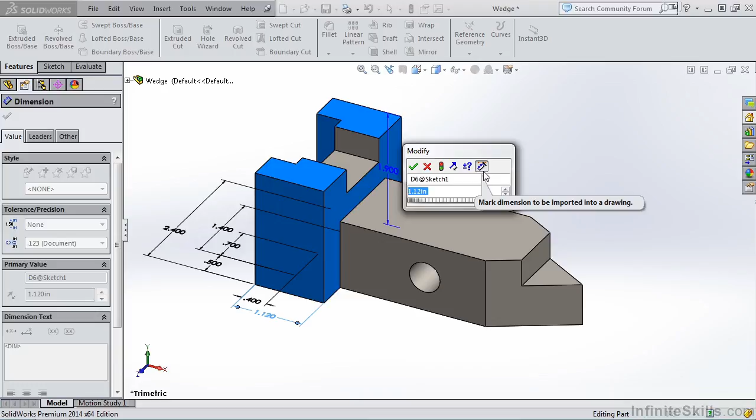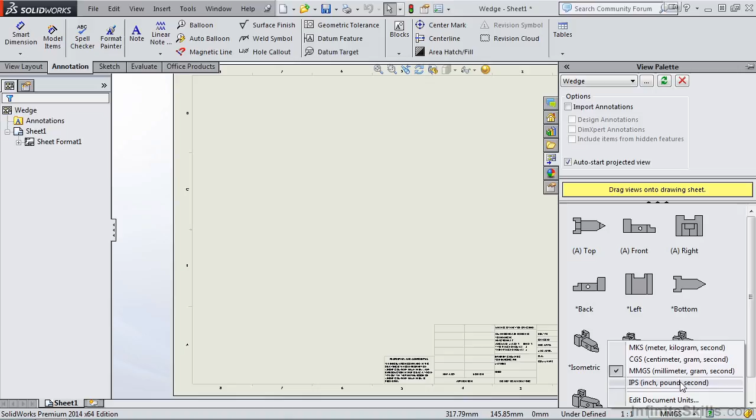With that said, let's close out of this dialog box and close out of this property manager, and let's create a drawing for this wedge. I am going to select the drop down next to the new icon, and then select Make Drawing from Part. We're going to use a B ANSI landscape. I'll select OK. And because the wedge was created in inches, I need to change my units to IPS. Now I'm ready to insert the view, so I go to the View Layout ribbon, select Model View, then Browse. I'll select the wedge, Open, and now I'm ready to place it on the sheet.

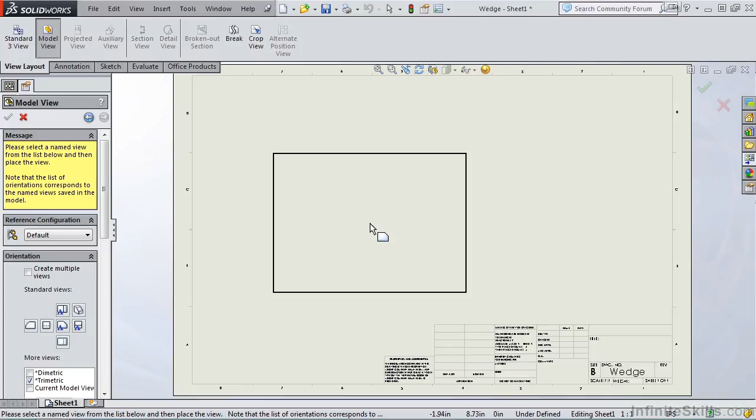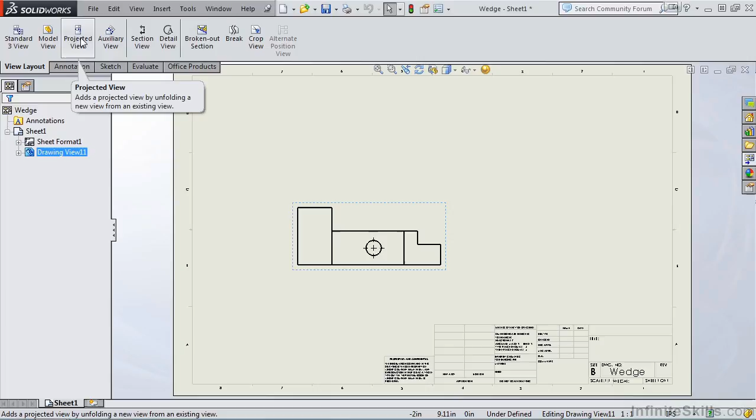For some reason, this rectangle looks too large for the front view I'm expecting. But let's go ahead and place it to see what we have. And this is why it's too large. It gave me a trimetric. Not a problem though. I simply need to go to the property manager and select the front view. There we go. I'm going to close out of this property manager, go to the View Layout ribbon, select the projected view, and project a right-hand side view and a top view. We'll then reposition the views so we have a little more room.

And now we are ready to import the driving dimensions that were used to build a 3D model for this wedge. So how do we import the dimensions? We need to go to the Annotation ribbon and select Model Items. The Property Manager opens, and at the very top of the Property Manager is asking for a source. Now, do you want the source to be the entire model or a selected feature on the model? I want it to be the entire model. Right below this, when we import these model items, do you want to import it to all of the views? In this example, it would be the front, top, and right side view. Or do you want to import the items to the front view, for example? I want to import the items to all views, so I'm going to put a check mark in this checkbox.

Right below this, we have an area for dimension model items. Notice one is already activated. This one is marked for drawing. These are the dimensions that were marked for the drawing back in the part environment. The next option is for not marked for drawing. Then we have instances and revolution, we have tolerances, and a few more. I'm only going to select the dimensions marked for drawing. Notice we have a checkbox to eliminate duplicate dimensions. Typically, you want that checked.

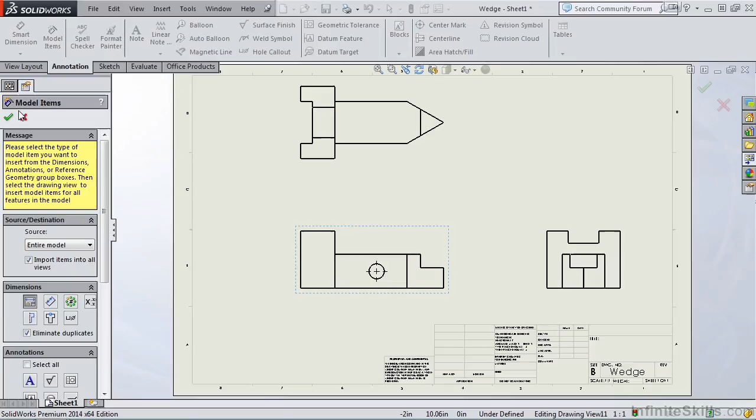Right below this, we can import annotations. For example, notes, finish marks, GD&T, weld symbols, and some others. Right below this, we have reference geometry, planes, lines, points. In this property manager, I am only going to select the dimensions marked for the drawing. I'll select the green check mark, and notice on the screen, the driving dimensions were imported into all views.

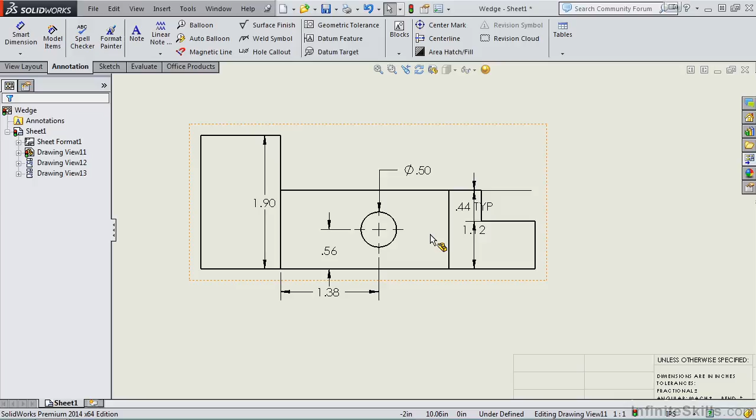Now, the downside to driving dimensions is you're going to have some cleanup work to do. Notice as we look around, I have crossing dimensions here, I have a dimension on the view here, a couple dimensions on the view here, so I do have a little bit of cleanup work to do. Now, this is a fairly easy part. When the parts get more complex, there's a lot more cleanup work. That is the downside to using driving dimensions. That's why some people prefer driven dimensions. You have more control over their placement, and it's easier to make adjustments to driven dimensions. So I'm going to go ahead and pull some of these out just by holding down the left mouse button. I can place them in a better location.

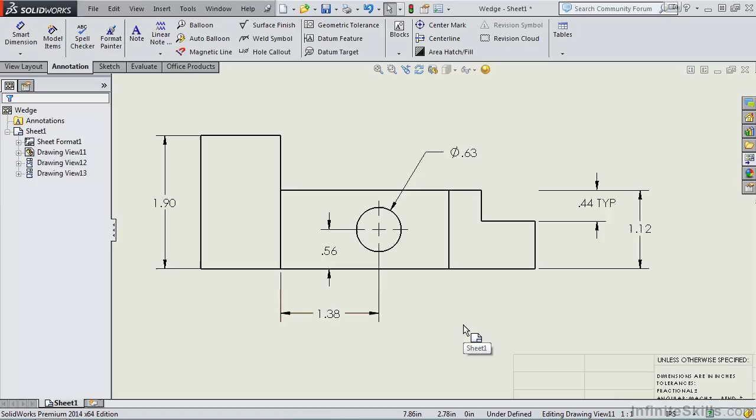The nice thing about driving dimensions, you can double click on a driving dimension, change the value, and the geometry updates on the screen. And once we save this drawing, the next time you open up this part model in the part environment, that change will be reflected in the model.

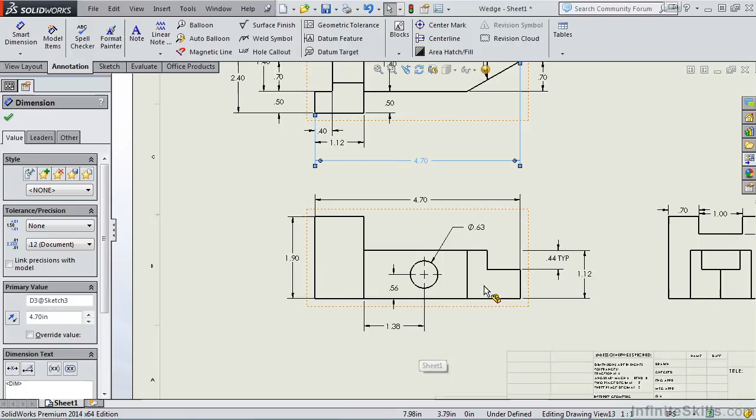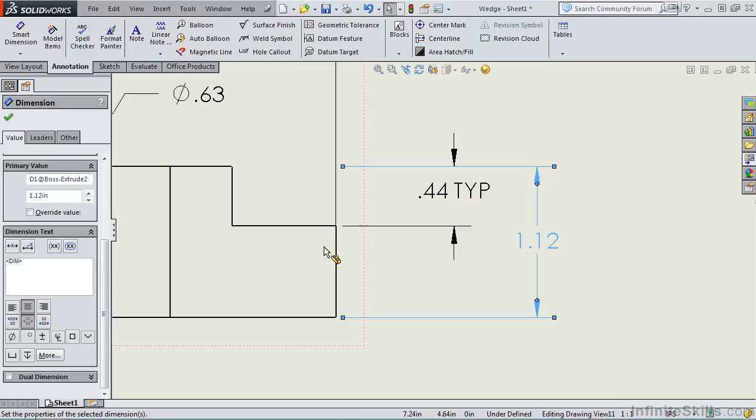Now I'm going to go ahead and zoom up on a couple of these dimensions here. If you select the dimension, notice you can click the arrow and it flips the arrow to the other side. If you select a dimension, the Property Manager opens. You can add tolerances. You can add a prefix, suffix. You can add common dimensioning symbols. Very easy to add and modify these values. I'm going to go ahead and close out of this and we'll fit this to the screen.

Now, if you do delete a driving dimension that was imported from a 3D model, no worries. If you delete a driving dimension in the drawing environment, it does not affect the 3D model. That dimension is still in the 3D model. So just be aware of that. Not a big deal if you delete a driving dimension.

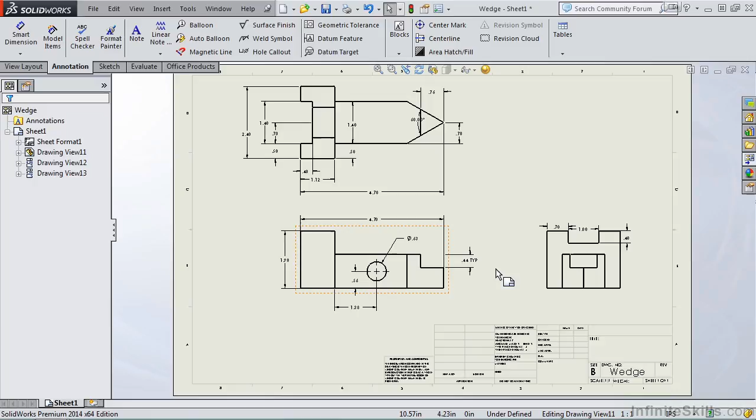So that gives you an idea of how driving dimensions work. A lot of people like driving dimensions because it's very efficient. These dimensions already exist back in the 3D model, so to insert them into your drawing environment makes sense. However, there is some cleanup work to do, so you have to decide if driving dimensions is for you. In the next lesson, we're going to take a close look at driven dimensions. Once you get through these two lessons, you will be well versed in both driving and driven dimensions.